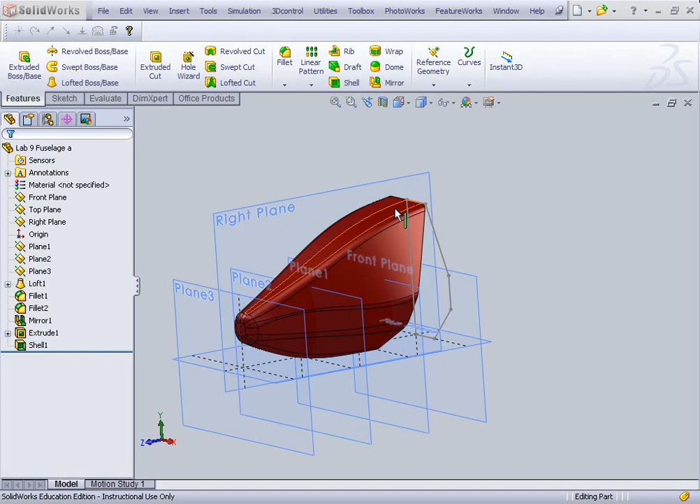Now that you have your loft complete, let's add a little bit more to our toy helicopter. The first thing we're going to do is add attachment points for the helicopter frame, putting 4 of those into our fuselage part.

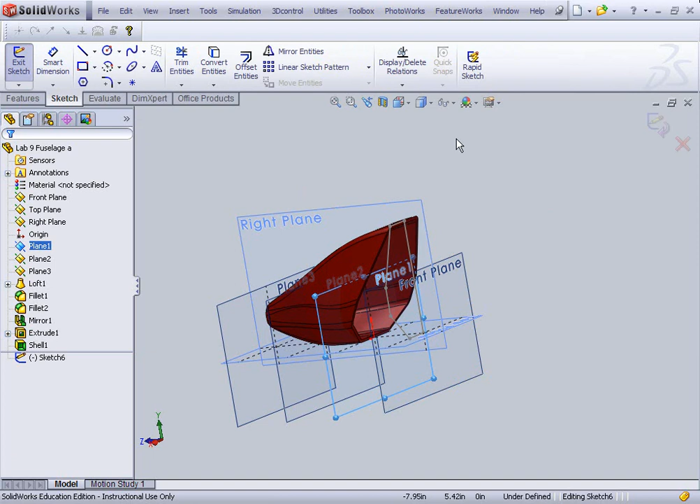There'll be an extruded boss base, and we'll open up a sketch on plane 1. On plane 1, you're going to draw 2 circles.

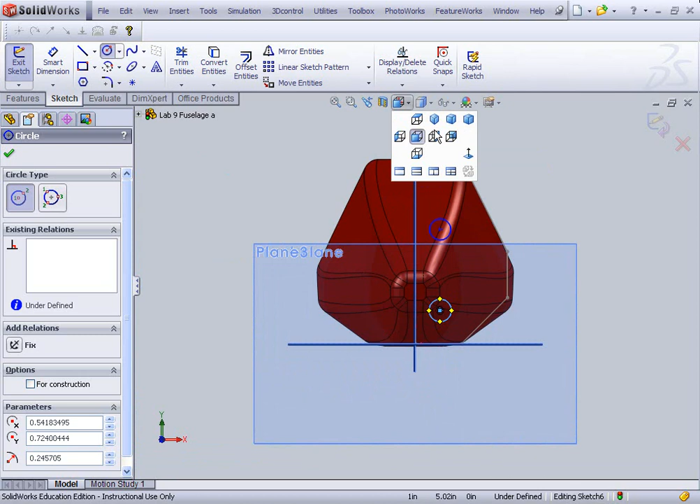Might help us a little bit if we view normal to this. And if you select that again, it'll bring it around so we're looking at it from the back. Put our dimensions on those circles. They're going to be 0.25 inch diameter.

And then if we add a relation, I can make the bottom circle equal to the top one.

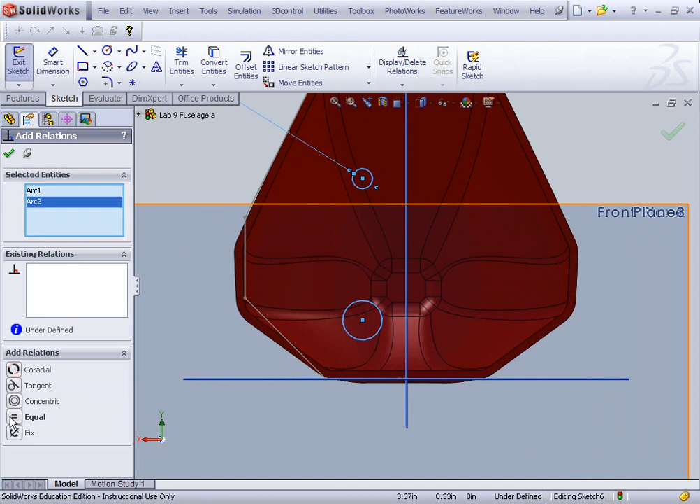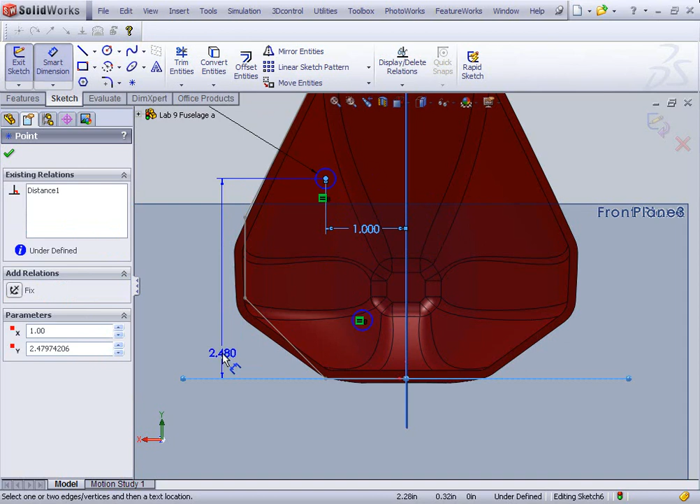Now I'm going to put in my x and y dimensions. This one, I want it over relatively close to the side, so I'll start out with 1 on that. And up about 2.5 from the bottom should be good.

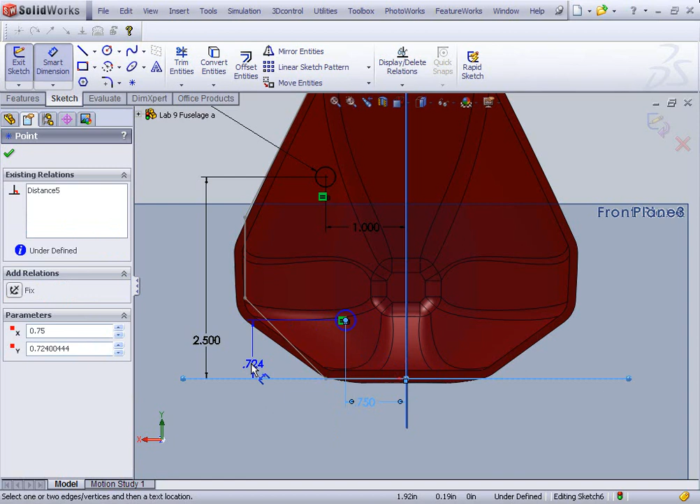Then I'm going to click on this one, move that over towards the side as well. I'll make that one 0.75, and up from the bottom, let's make that 0.5. Okay, so now we've got that sketch.

The next thing we're going to do is go up here, click Offset Entities, and we're going to select both of them. The wall thickness of 0.1 inches is fine for that.

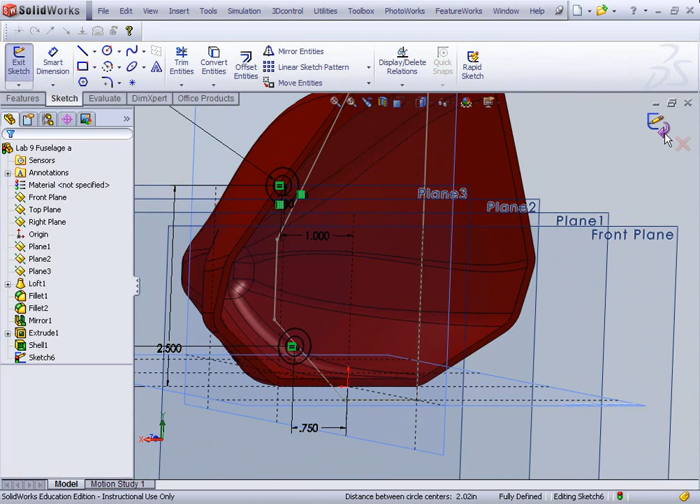Then we're going to exit our sketch, and of course the extrude command opens up. Now we want these to go up to, but not through, the surface of our fuselage, so we're going to select up to next.

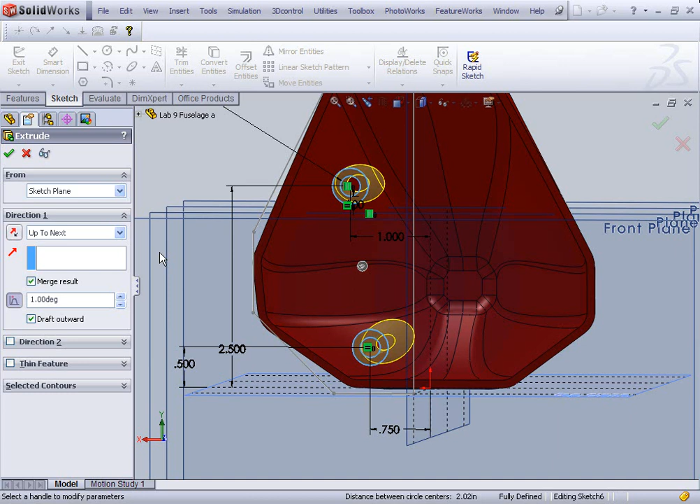We could also potentially put some draft on this. We want that to draft outwards, so you could pull this out of a mold, make that 3 degrees. And we're going to check OK.

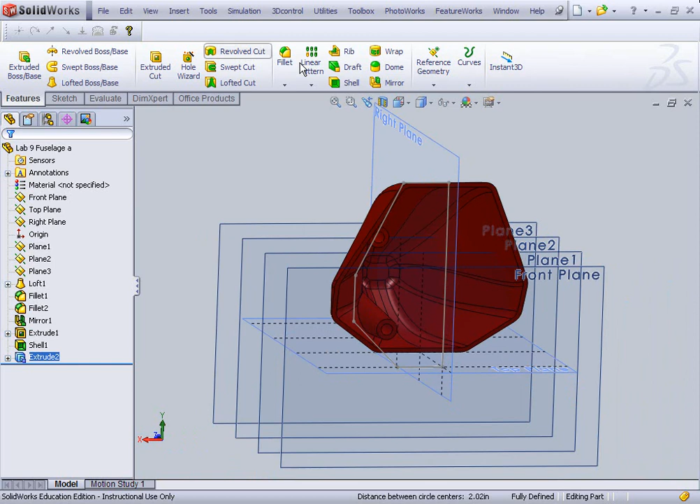So we've got those. Now, if we want 2 identical ones on the other half of the fuselage, we're going to go up and select Mirror, click on the right plane. SolidWorks already has the features selected - if they weren't there, you could add them by clicking in that window. And we're going to check OK.

So now we have our attachment points for the frame for the helicopter.

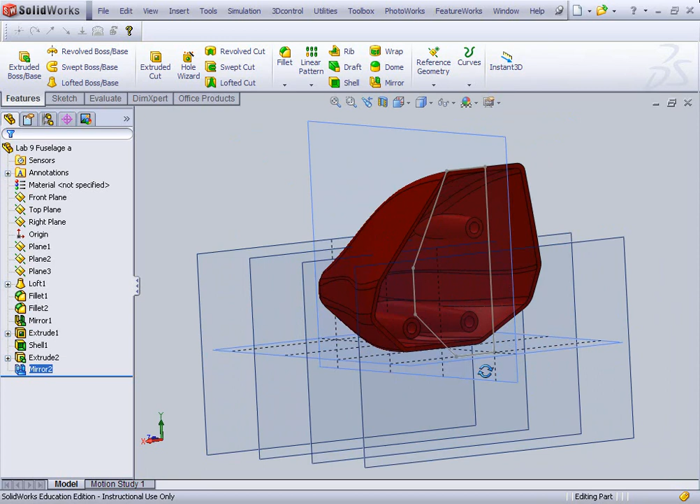The next thing we're going to add is we're going to open a 3D sketch. So we're going to go up to Sketch, 3D Sketch, select the line command, and we're going to draw the rungs for the helicopter landing gear.

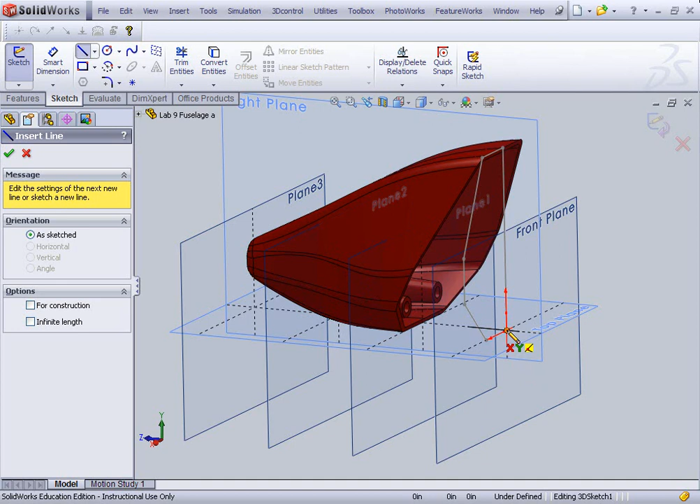So we're going to start out on the XY plane, come out towards ourselves a little bit, then we're going to go down at an angle, hit Tab - that lets us switch over to the YZ plane to go forward. I'm going to move forward, and then up. Hit Escape. If you rotate around a little bit, you'll see your landing gear rung.

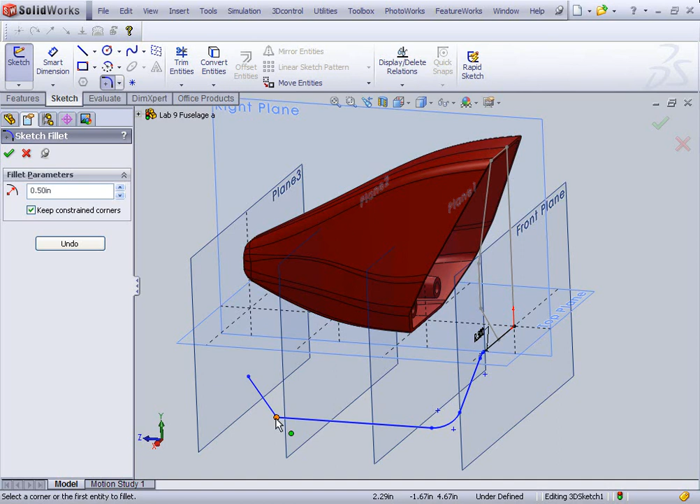We'll go up here, select Sketch Fillet. 0.5 would be a good radius for that. Click there, there, and there. Click OK.

And we've got our path for our sweep. We'll exit our sketch.

On the right plane, we'll open a new sketch. Select our circle, come down in here, draw the circle in. And that one we're going to give a diameter of - and I accidentally selected the front plane there, so go back up, hit Smart Dimension. I'm going to get a diameter of 0.25.

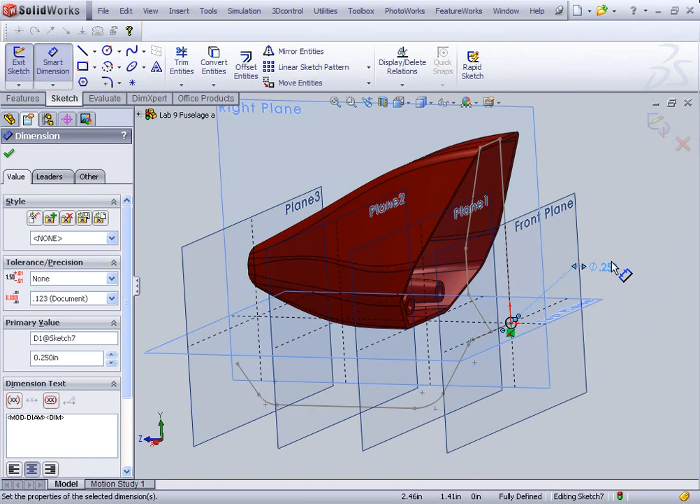We'll exit this sketch, because remember you can't be in either sketch to go start a swept boss base. Then we'll come up here, select swept boss base. SOLIDWORKS already grabbed my profile for me. The next thing I'll do is grab the path, and we can put in our rung for our landing gear.

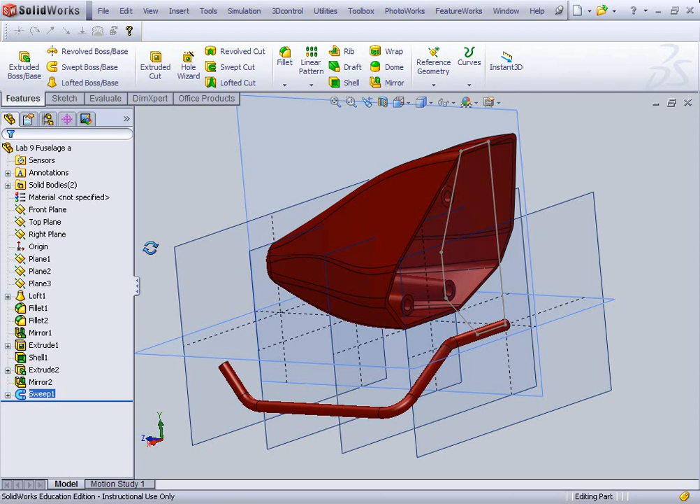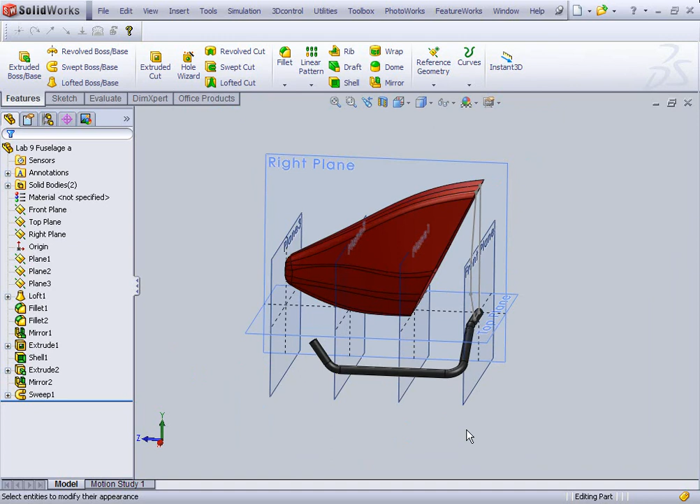If we wanted to change the color on that, we could go up to Appearances, select the sweep, and I like gray for that one, so let's go select a dark gray. There we go. So we've got one piece of our frame for our helicopter.

The next thing I'm going to do, you guys don't have to do this in your lab. For your lab, I basically want you to mirror this over to the other side, and you can turn that in. If you want to do a little bit extra, we're going to sketch a tail section for our helicopter.

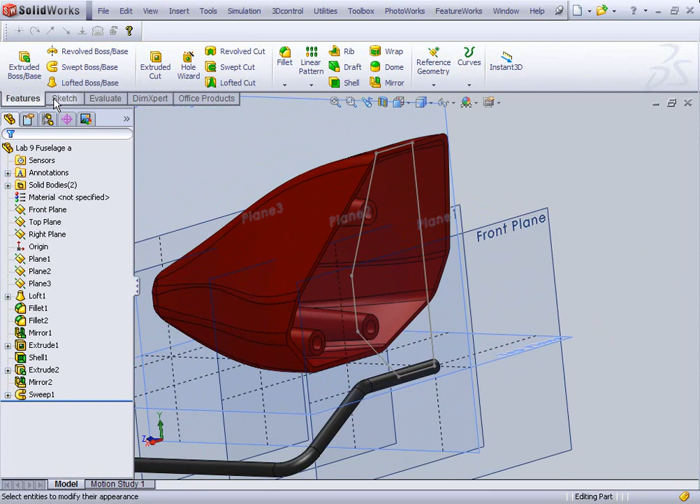So we're going to open a 3D sketch, get the line command open, and we're going to get the center of this boss right here.

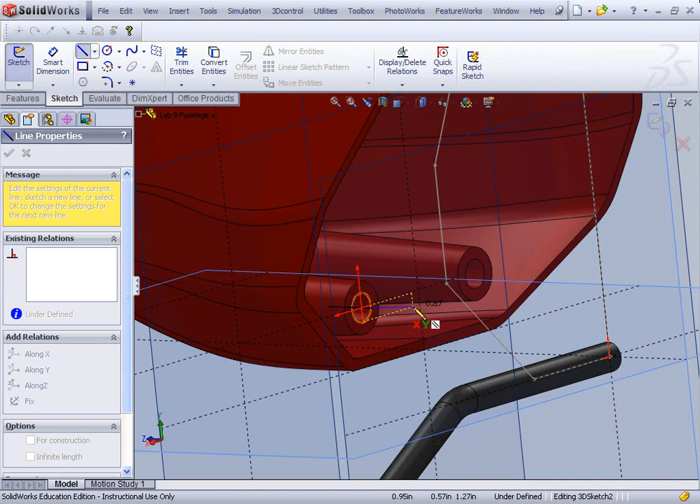We're going to click on that center, and then we're going to come straight out from there. If you notice, we're actually in the XY plane. We don't want to be in the XY plane, so we're going to hit Tab. That gets us into the YZ plane.

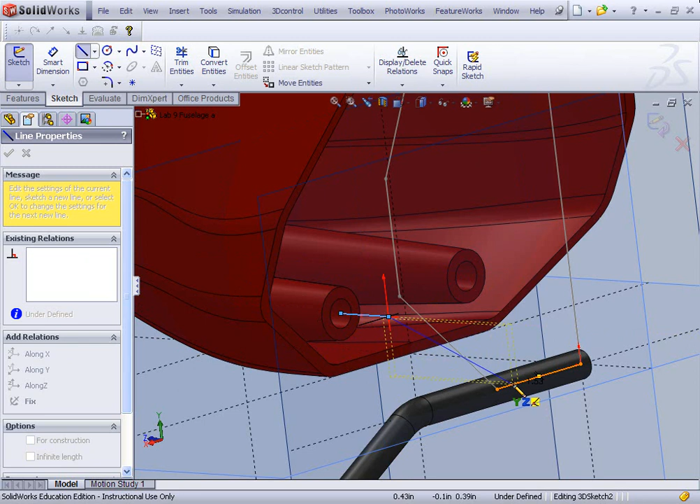So now we actually are coming straight out. We'll come out about half an inch, click there. Then we're going to go down to our line for the center of the gear rod. We're going to click there. We're going to zoom out, rotate around a little bit. We'll click back up in here to create our tail.

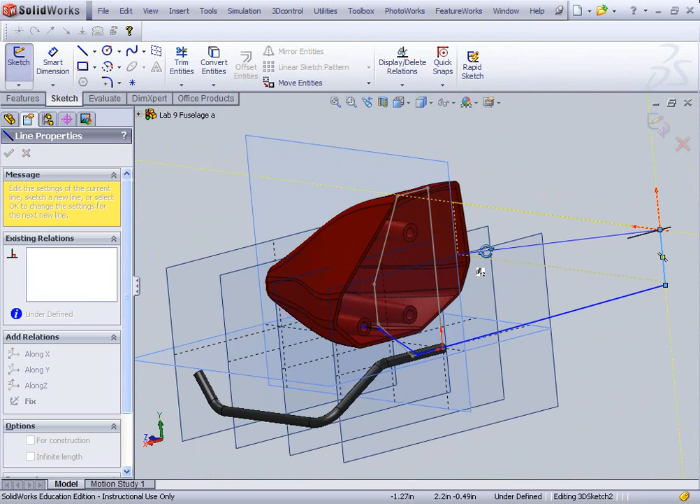All this is drawn in the YZ plane. Then we're going to come forward again, up into this area. So if you can see that.

And then the last thing we're going to do is zoom way in and get the center of that boss.

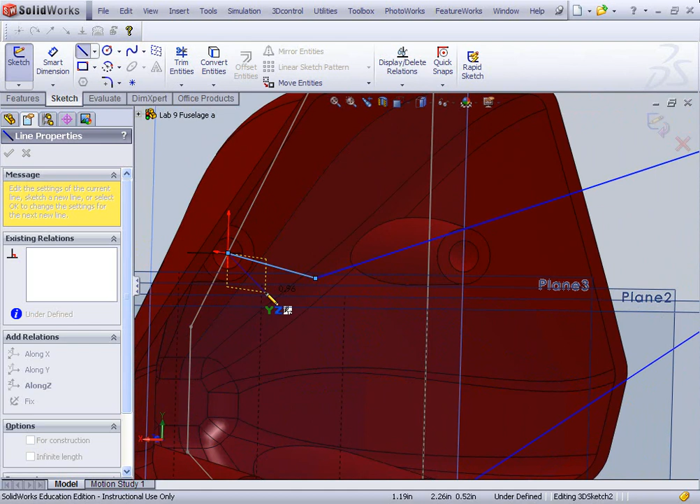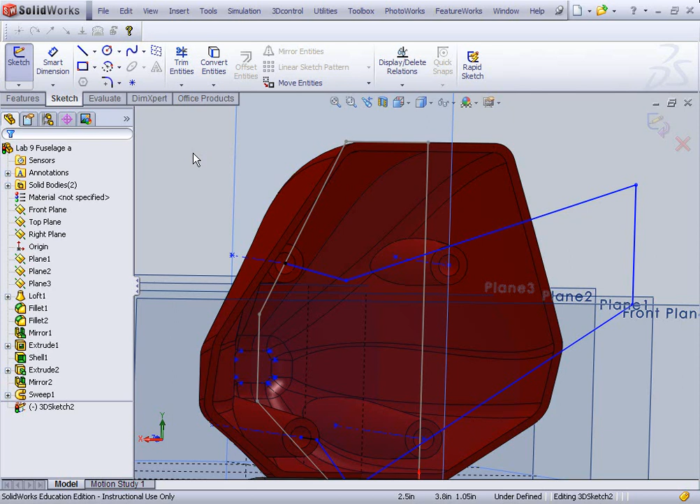Now we're going to add some relations to this sketch. In order for SOLIDWORKS to complete a sweep on this path, we can't have two circles come in that aren't right aligned with each other. So I need to align this edge with the center axis of that boss. I'm going to go up and select temporary axes, and then I'm going to add a relation. I'm going to make them collinear.

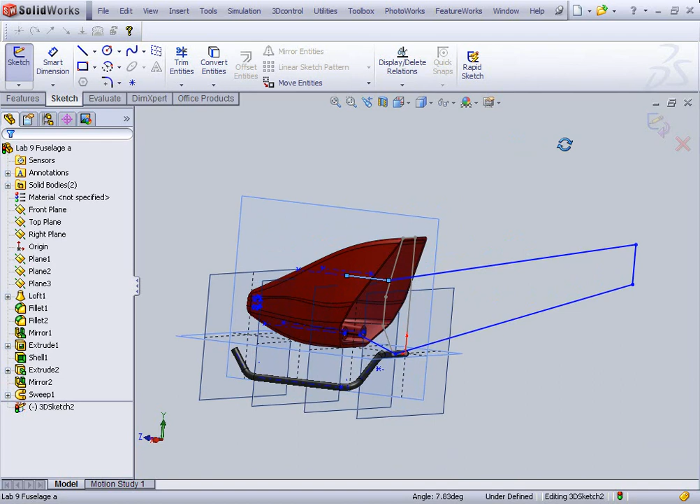And now if we rotate around, we can see that our tail section is going out. We don't really want that. We want that to be going in.

So I'm going to grab this line and that plane and put a dimension between them. And that is actually going to be, I like 0.5 for that dimension.

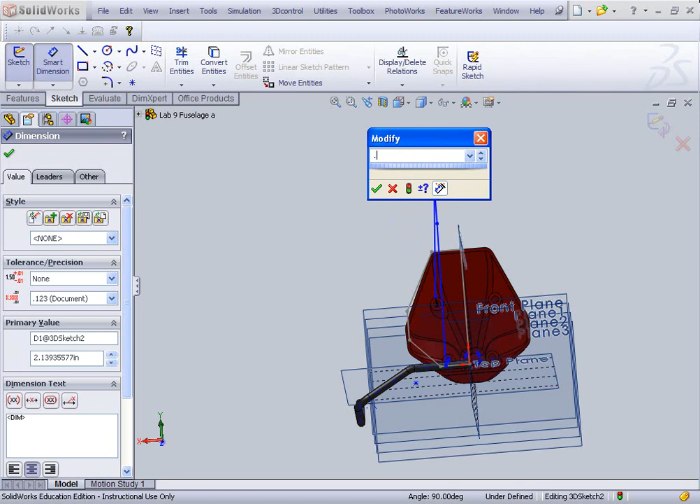So now if you look, your sketch is actually curving back inwards a little bit. And that's going to be pretty good for our path.

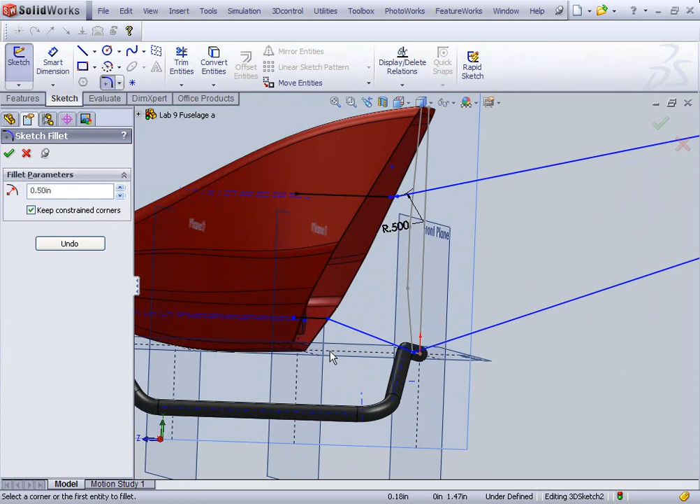The last thing I want to do is put in my fillet. So I'll leave 0.5 the same. You could constrain all these points if you wanted to. We don't necessarily have to, for me to show you the point of this.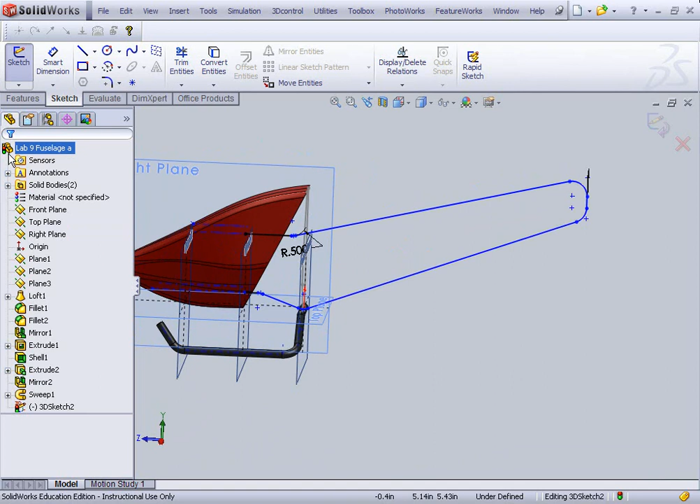And there's our rear, our tail rotor support for the helicopter. Check OK, and then we're going to exit our sketch.

So we've got a 3D sketch that's not entirely defined. That's all right in this case.

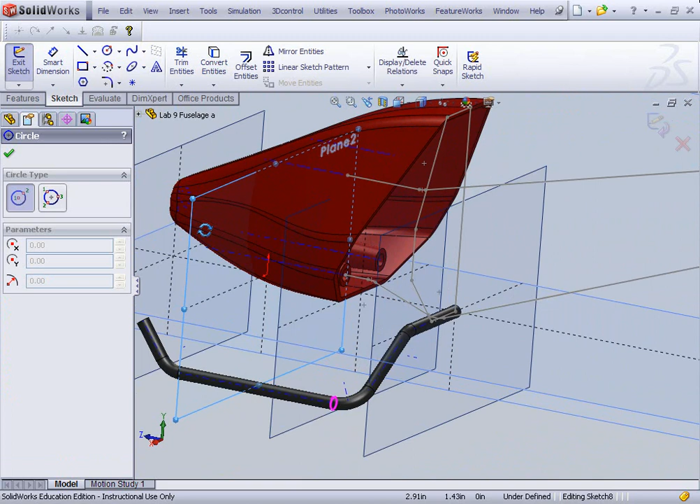Now we're going to go back to plane 2, and we're going to open another sketch on plane 2. And I'm sorry, that was supposed to be plane 1. So we're going to go to plane 1, open a sketch on plane 1.

And then we're going to go and convert that entity, and back out and exit the sketch.

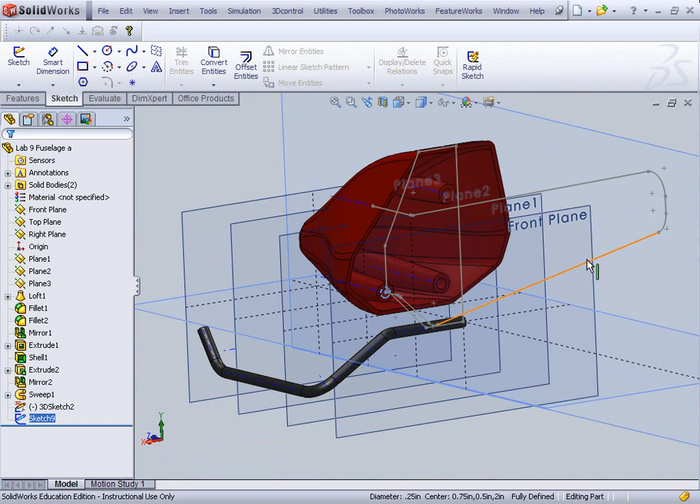Okay, so now we have two sketches, a path and a profile, which are requirements for Swept Boss. We're going to go up here and click Swept Boss Base. We've got our profile selected already. We're going to select our path, and we're going to check OK.

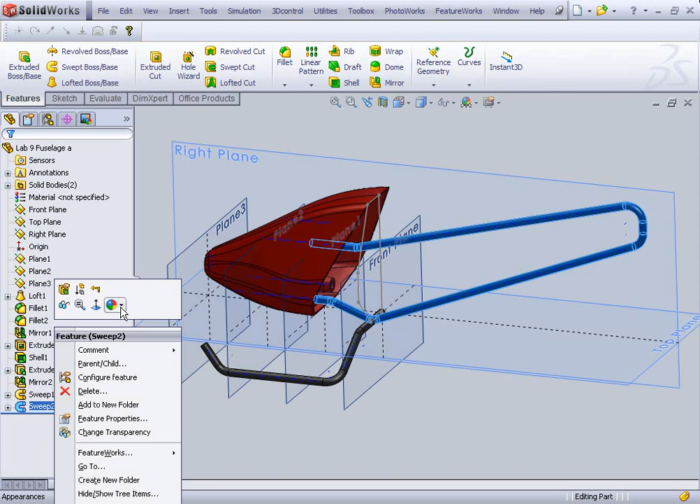And now we've got another portion of the frame for our helicopter. Again, I'm not so keen about maroon for that color, so I'm going to change that color over to dark gray.

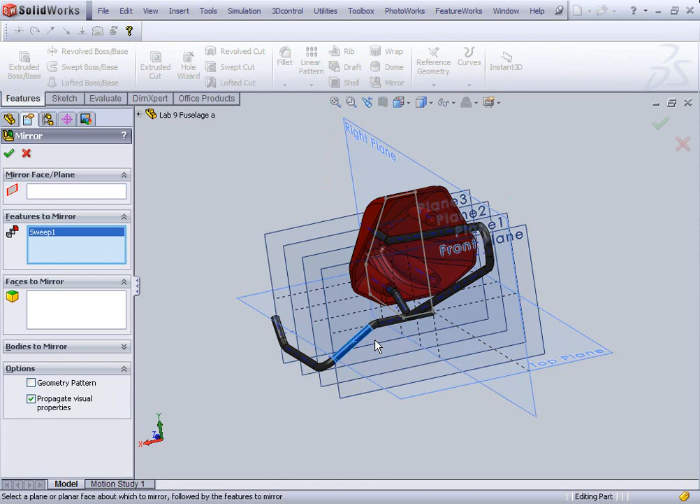So to finish out our frame, we're going to mirror this part, and I want to select features to mirror. I'm going to grab the rung and the frame, the two sweeps, and then I'm going to select the right plane as the mirror plane and check OK.

And now we've got pretty far along with our helicopter.